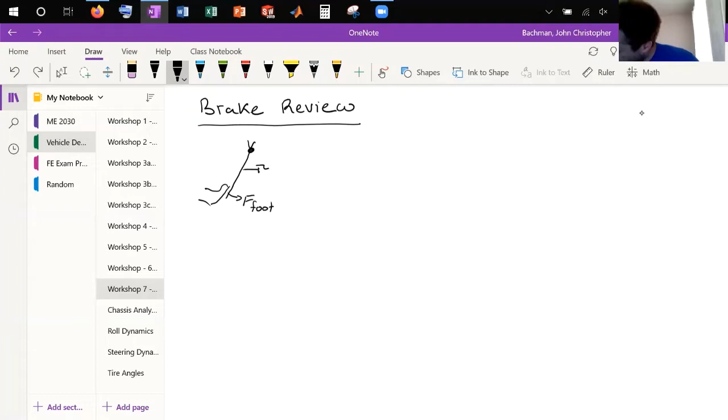So we said a simple model of the brake system was we had some pivot, right? That pivot was basically what our brake pedal pivoted about. Then we had the driver's foot, applying some force here. This was connected to a master cylinder, and we drew a little bit like this. This went out to our tire and our brake rotor, and we had pads on both sides of this thing.

Usually there's a piston on this side, but we'll ignore it for now, as it doesn't really affect whether or not you're going to lock your brakes. This went out to here. This is the system we thought about, filled with incompressible hydraulic fluid. I should draw this better out here. And then we have a big master cylinder.

A couple of the important things we cared about in this case were: the length of the pedal, down here to here. We cared about the length to the master cylinder. We cared about the area of the master cylinder. We cared about the area of the piston and the calipers. We cared about the distance from the center line of the tire to the radius of the pad, so we call that kind of the center line of the pad. And we cared about the coefficient of friction between the pad and the rotor. So those are the important things.

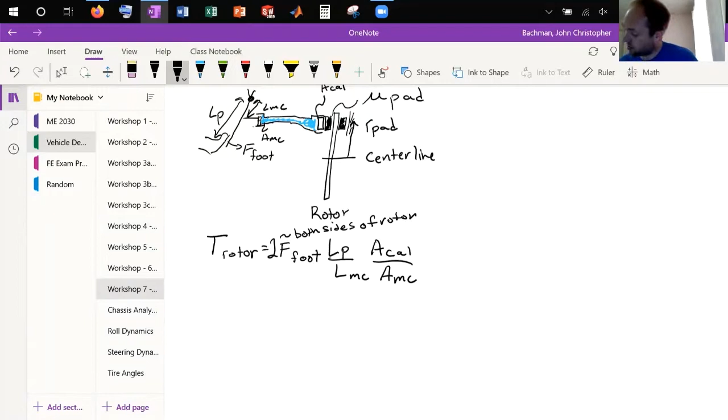Remember, for Baja and Formula we use tandem master cylinders, so that also divided this by 2 down here. So we ended up having two factors of 2 that canceled out. This got multiplied by the coefficient of friction between the pad and the rotor, and then the radius of the pad. So everything to the left here is a force, and the other thing is the radius.

So that was the torque on the rotor, and we compared that to the torque we needed on the tire to lock. The torque we need on the tire to lock was the coefficient of friction of the tire to the ground, times the radius of the tire, times the normal force. And the normal force we found was the weight divided by 2, because we have a left and right tire, divided by 2 times the wheelbase times... so we'll do this for the front.

And we said this was C plus mu times the height of the CG. That was if we drew a little schematic of the car, with the CG here, and this is the height of the CG. This distance from here to here was B. This distance from here to here was C. And this distance from here to here was the wheelbase.

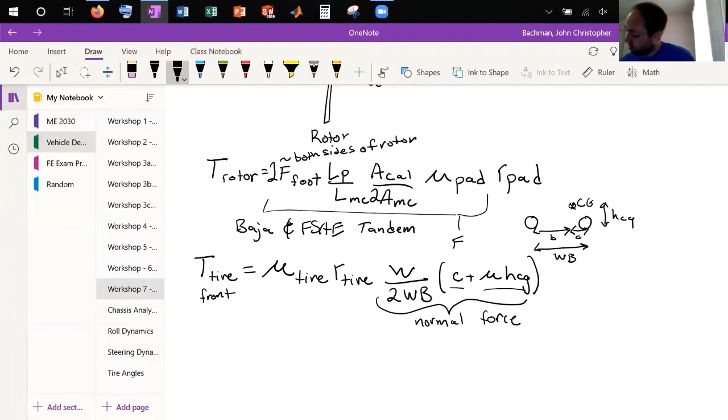So this term, this is the normal force on the front, and it's got two components: the static component here with the C, and the weight shift component. As you're braking, that weight gets shifted to the front. So the equivalent term here for the rear—if it was the rear tire, everything's the same except it's losing the weight shift, losing the weight from the weight shift, and it's a B, because for the rear you care about the distance here. So B minus mu times height of CG.

You might think it's kind of weird—why is it for the front the distance C, from the rear? You can just think about it because the CG went all the way over here to above the front tire.

So this C would cancel with the wheelbase, giving a factor of 1. That says the normal force on the tire statically is the weight over 2, which makes sense if the CG is right over the front, and you just divide by 2 for the left and right tire.

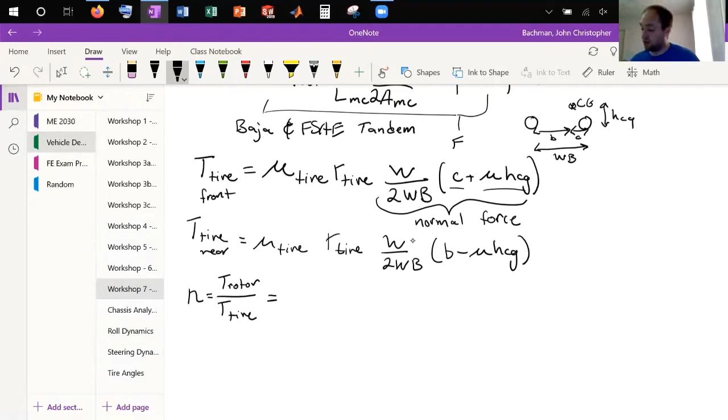So typically we wrote this N as a factor of safety. It was the torque applied on the rotor over the torque needed on the tire to make it lock. We were hoping the torque we can get on the rotor is bigger than that, so we put everything in these terms on top.

So we have the force of the foot, the length of the pedal over the length where it connects to the master cylinder, the area of the caliper piston over the area of the master cylinder, the coefficient of friction of the pad and rotor, the radius of the pad, and then we divide by everything else here.

So I'm going to put the force terms together. We have weight, that 2 will come over the top, but it's okay, wheelbase C plus mu times height CG, and here we have mu of the tire and R of the tire.

So it's kind of cool, like in fluids when you have these non-dimensional terms that affect things. You basically have 5 non-dimensional terms here: 1, 2, 3, 4, 5.

You need to apply more force on the foot than the normal force to get an amplification. Basically, if you can get the length of the pedal bigger than the length of the master cylinder, or the area of the piston on the caliper over the area of the master cylinder, that gives amplification.

If the friction's big on the pad, that's good, especially since you'll be more likely to lock it if you're on ice, where this coefficient of friction will go down. And the closer you can get the radius of this pad to the tire, the better.

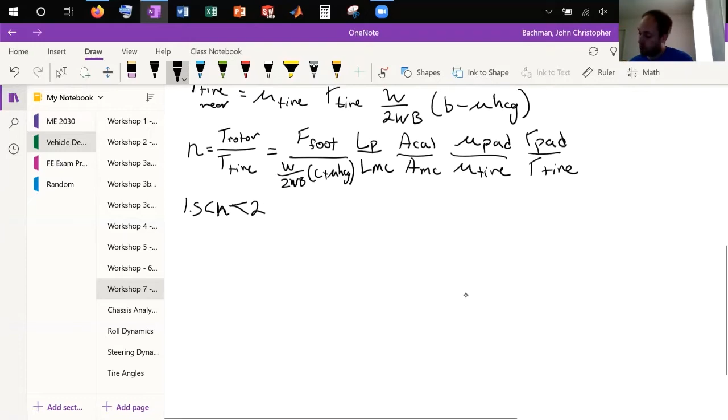Last 2 for brakes, basically. We talked about starting with the inner wheel diameter, so you start with the ID of the wheel to give you an estimate of the R to the pad - the radius to the pad.

And you can look these 2 up. Then to get R pad, you kind of assume to start you probably want LP over length of the master cylinder to be around 3. So that gives you these 2 terms.

You can assume the force on the foot is maybe around 150 pounds, and you can figure out everything about the bottom roughly if you know some stuff about your car. So once you do that, it gives you an estimate of the ratio of the area of the piston on the calipers to the area of the master cylinder.

And you can start to look at the pressure of your hydraulic system, which is the force of the foot over 2 times the area of the master cylinder if you have a tandem setup. So you can figure out what kind of brake system you want - we usually use Wilwood systems. Once you know that, you can begin to package your brakes and calipers.

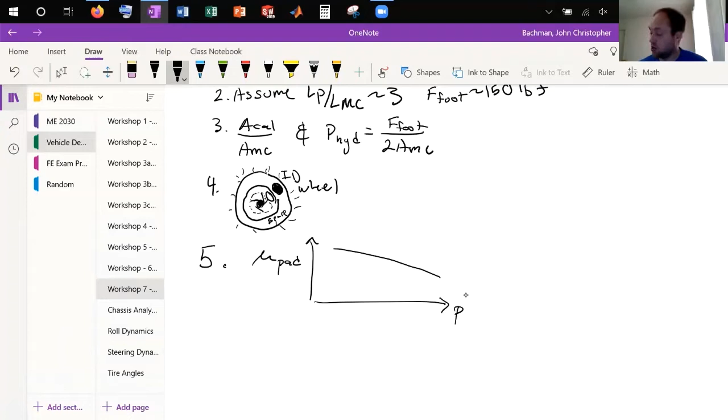We also talked about how the coefficient of friction of your pad versus pressure looks something like this. If you take too many cutouts out of your rotor, or get your pads too small, your pressure will go up. The pressure associated with the force on your brake pads probably looks something like this typically.

If you're not using all of that area, the pressure goes up between your pad and the rotor. Because this pressure I'm talking about is the force on the rotor divided by the area of the pad, basically. So it's not the pressure on the hydraulic system; it's the pressure between your pad and rotor.

That's why higher coefficients of friction happen at lower pressures. We see that with tires too. So you don't want to cut out too much, and we've seen that before. Then you can do thermal stuff, you can do FEA stuff, figure out how thick your rotor needs to be, all that jazz.

So are there any kind of questions about the braking system from folks? Any of these terms?

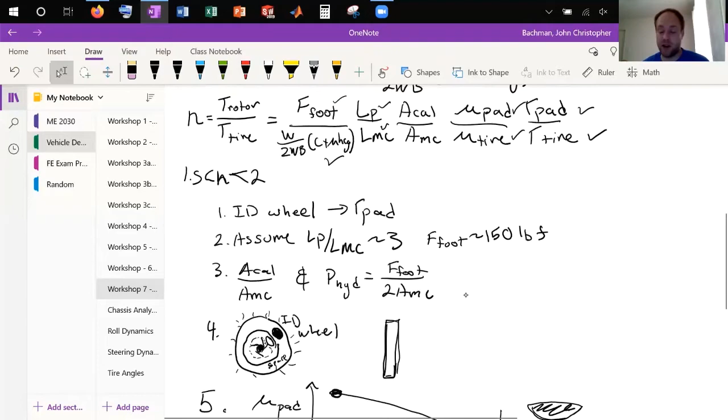But I think this one's one of the more intuitive results in my mind - like why, the kind of things that cause you to lock up the wheels.

So we had that little special session last Saturday about vehicle dynamics and roll, and I'm just going to mention some of the key points here - one, to try and get you to go watch it, and two, because some of them relate to our chassis design. So we looked at a half car model.

Say your car looks like this. Let's say you've got some tires. So let's say your tires pivot about some roll center here. Let's say they've got some spring up to here.

So this is kind of a model where this spring is the wheel stiffness. So this is a spring - this is K wheel, this is K wheel. And we're looking, we could be looking either at the front or the rear right now. And this is the roll center. This might be your CG.

This distance from here to here is the height of your roll moment. The distance from here to here is the height of the roll center, from the ground. Keep in mind the stiffness of the wheel is like how much force is applied on that whole wheel assembly, how much does it travel up and down.

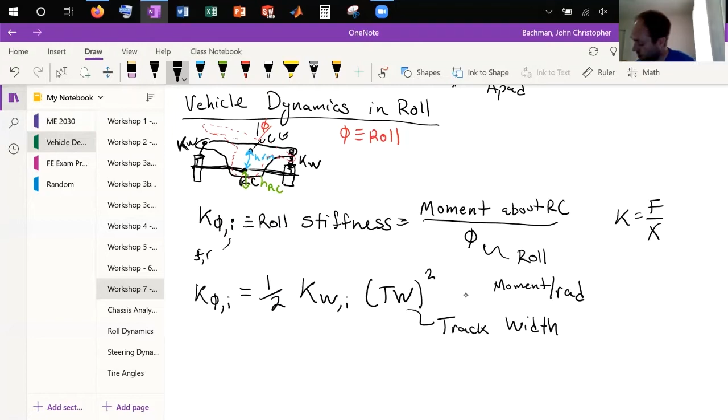Right, so this is going to give you per radian, and you do it in the front and you can do it in the rear. So then we remembered last time that K of the wheel, we relate that usually to a natural frequency, just to get us some of the ballpark, and this was omega n. Usually the rear is a little bit higher, maybe like 10% higher than the front, times 2 pi squared times the sprung mass, either in the front or the rear. So that's how usually we got the wheel stiffness to start.

All right, so we cared about the roll stiffness, but we also cared about this thing we called R roll, which was the roll rate, or roll flexibility. This describes how much the car rolls, so like phi, how much does the car roll per lateral acceleration. So if you took like a 2g turn, how many degrees or radians does the car roll - that's what this number tells you. And so we found our roll rate.

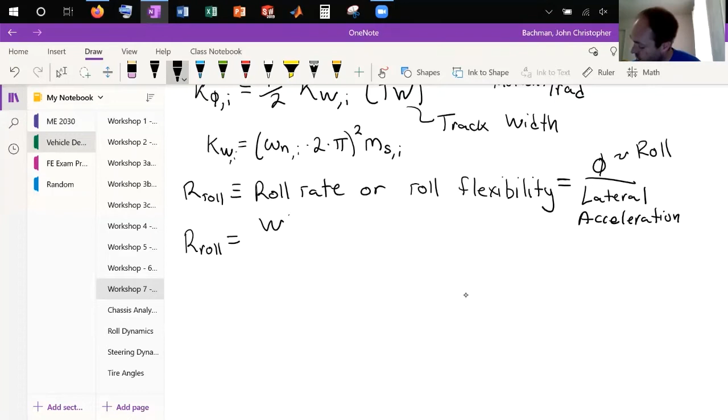And last time we said, okay, what is causing this roll? And so that was the mass divided by, in this case since we're doing this per acceleration, we divide by acceleration. So mass times acceleration times the height of the roll moment. And this was the height of the CG minus the height of the roll axis, so the roll axis above CG.

So this was kind of weird in that in a car, you have a roll axis probably a little higher in the rear than you do in the front. So your car rolls about - this is your height of the roll center in the rear, height of the roll center in the front, so this is your roll axis. So your car rolls about this roll axis connecting your front and rear, and your CG might be here, so the height of the roll moment is right here. So for the whole car, that's your height of your roll moment.

It's actually like, so you kind of have to imagine you have to know something about the front roll center, the rear roll center, and you have to draw a line between them and then get this distance. It's not too hard to do mathematically, it's just the line. So that's how you find this height of the roll moment for the whole car.

And then you just divide that by the stiffness. So you have K phi of the front, plus you have a term for the rear, and you have actually minus this weight times height of the roll moment. And that's because, as it rolls, this CG actually rolls too, which now the weight of the car actually helps it roll more. So that's why you get this little term. It doesn't, if you neglected it, play a huge role typically, but it's there.

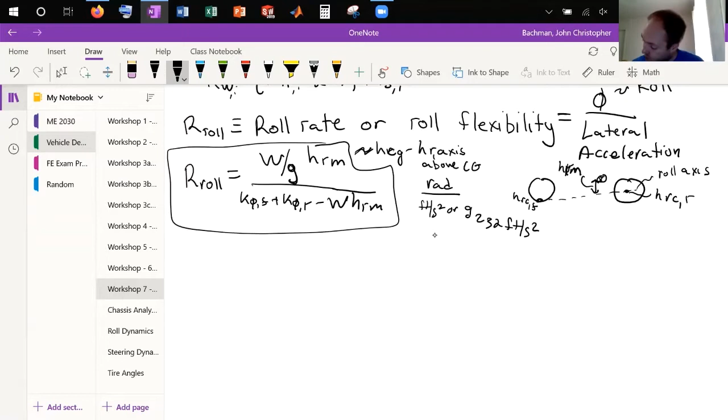So then what we kind of cared about, actually maybe the most, was what was called the lateral load transfer distribution. How much load is being transferred in the front versus in the rear? This was LLTD, is what most people call it. What's the LLTD? So we compare, and this is usually front divided by rear, because you want close to the same load transfer.

So if you have more load transfer in the rear, you're going to get oversteer essentially, and if you have more load transfer in the front, you're going to get understeer.

So I'll go into that in a little more detail. This LLTD, the load transfer in the front, we found was the roll stiffness in the front times the total roll rate. This is for the whole car, not for front and rear separately. There's no roll rate defined for front and rear individually, it's for the whole car.

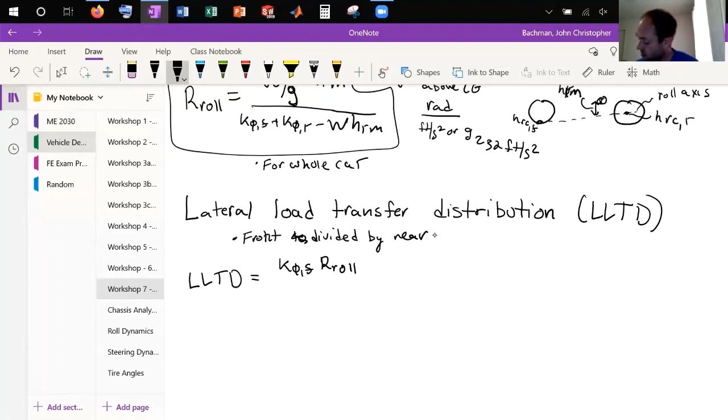But this other term is for the front. When you multiply these two together, you get roll per acceleration. This term up here is moment per roll. So what that gives you is moment per acceleration. It's kind of like the moment is what's causing the weight transfer.

So you have K phi F times R roll, plus you have the weight of the front divided by G, times the height of the roll center of the front. That's the height of the roll center. And you have the same terms for the rear: K phi of the rear times the roll rate for the whole car, plus the weight in the rear divided by G times the height of the roll center in the rear. So this term is kind of the weight transfer through the suspension links.

And this term is going to be equal to the weight transfer through the springs.

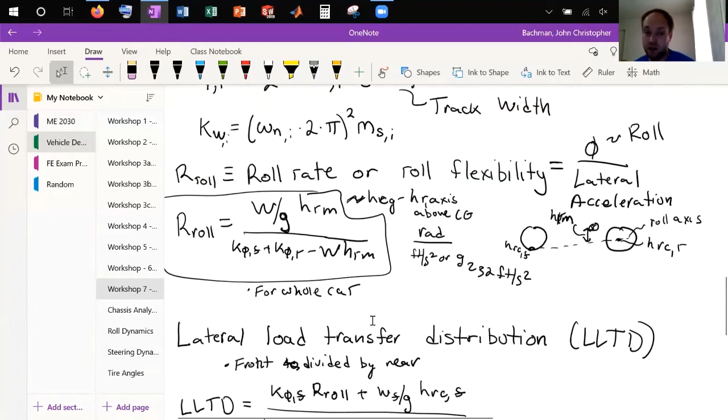The way you can see that is, for example, if you designed your roll center all the way right here at the CG, then your car doesn't roll, because you have no roll moment, so your R roll is 0. And so these terms basically go to 0. So how is the weight being transferred? Well, in that case, the weight is basically being transferred directly through this link, between the suspension, through your lower control arm and upper control arm.

And so you usually design this, you want your LLTD desired. You usually design it for a little under 1, about 0.85, because stuff that you don't take into account usually causes you to understeer. There's compliance in all your links, the camber of your tires. Usually things cause understeer.

So we err on the side of making the car oversteer.

So an LLTD of less than 1 is kind of oversteer, because that means you have more weight transfer in the rear. And LLTD greater than 1 is understeer, because you have more weight shift in the front. And so you go a little under 1. And so what you're typically going to find here is you're going to get like 0.5, 0.6.

And so you need to make your rear a little bit, you need to make your front a little bit stiffer. You need to bring this up.

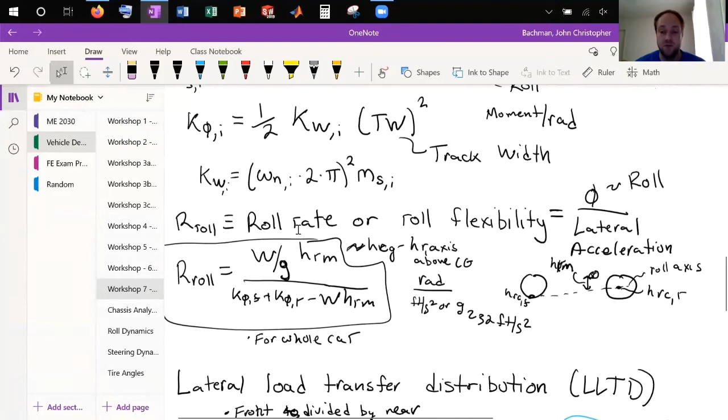You can obviously adjust it by adjusting the stiffness of your shocks, right? Because we see this, so if you can adjust your stiffness of your shocks, you can adjust your tire pressures, you can do a lot of stuff. But usually you'll see a car will have several spots that the anti-roll bar can be connected to. And the reason for that is so that you can adjust the stiffness of the anti-roll bar to tune this in so you're getting neutral steer, basically.

So that's a little bit of the basics about roll dynamics and how you handle it. We were doing a lot of linear systems before, but how do you consider roll, which is especially big for formula. But I think Baja, interestingly enough, always makes this interesting.

They want a crazy amount of oversteer because they have a fixed rear axle, so they have trouble steering. If they have a ton of oversteer, they can kind of drift. So they artificially make their rear super stiff with super stiff springs, but in actuality, it makes it harder to drive over the bumps. I think ideally we use an anti-roll bar rather than make our rear springs so crazy stiff. I think it also causes the forces in the rear to be larger than they need to be, so I think we also break things more likely because of it.

That's just total speculation. I have a question - that anti-roll bar, that's just for the front? So if you did the rear, you'd put it on the bottom?

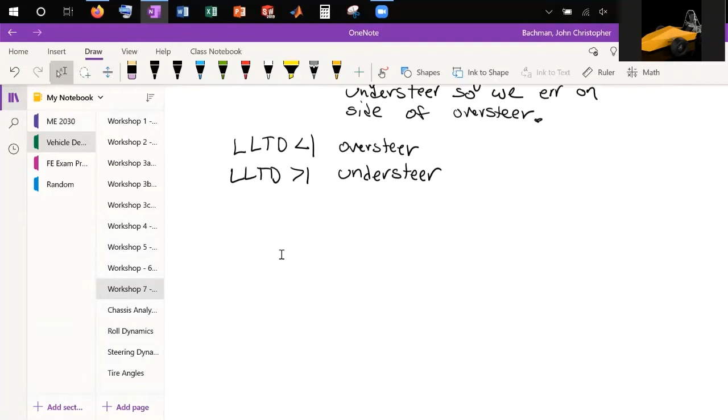Yeah, exactly. So for example, if you found we need to make it stiffer in the rear to get down to this, then you do the same thing, but you'd add one in the bottom. Or you should also be checking your phi max.

What's the max amount of roll you're going to get, which would be your R roll times your max lateral acceleration. And then basically, what you do is you get delta, let's just say max tire travel, is going to be equal to your phi max times your track width over 2.

And so in that case, you have to make both the front and rear stiffer. So if that's the case, you might add them to the front and rear to make this whole part stiffer, to make the whole car stiffer, and then you can adjust them to get the desired value of this.

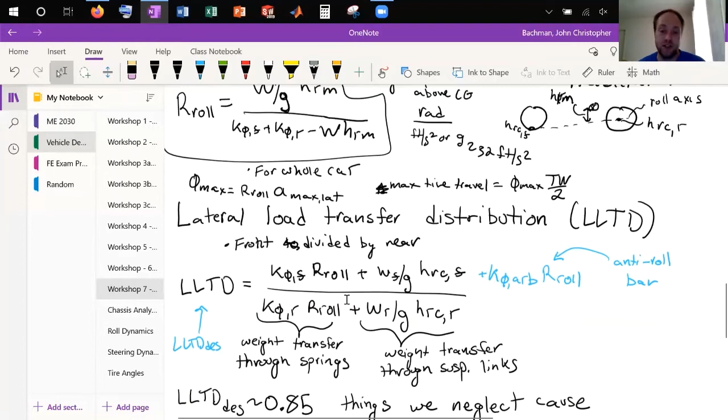Keep in mind when you change this, it also will affect your roll rate, so you should actually iterate on this process. You should figure out what this is, then add this term, just the K phi part, into here, recalculate R roll, and recalculate your LLTD again. Because this R roll is also a function of this term, so when you change this term, it'll actually change R roll too. But usually if you do this one iteration, it's pretty close. So that's a little bit of the last bit there.

So I think we're ready now to talk a little bit about the chassis, or otherwise known as the frame, or I think the Baja rulebook calls it the roll cage. So of course this is kind of, we usually do a tube frame. There's monocoques and other stuff these days, but I think for us, probably we're going to be doing a tube frame for at least the next 3 to 4 years. I don't think there's that much to gain from it, and I don't know if we have the resources to start doing the monocoque quite yet. We're not even doing aero yet.

But so I think first rule of chassis is pass all the rules. This is the one subsection that has the most rules associated with it. The nice part about it, if you pass the rules, it'll typically help you do the other things. But I find too often with our teams, people just don't even know the rules. Sometimes I feel like I'm coaching a basketball team, and one half of the team is arguing we should shoot the 4-point field goals, and the other half is arguing we should shoot the 1-pointers, and then we spend like a week or two arguing about which one's a better strategy, and then we look in the rules and realize that's not even something in the rules. So it's like our meeting - this is a competition, right?

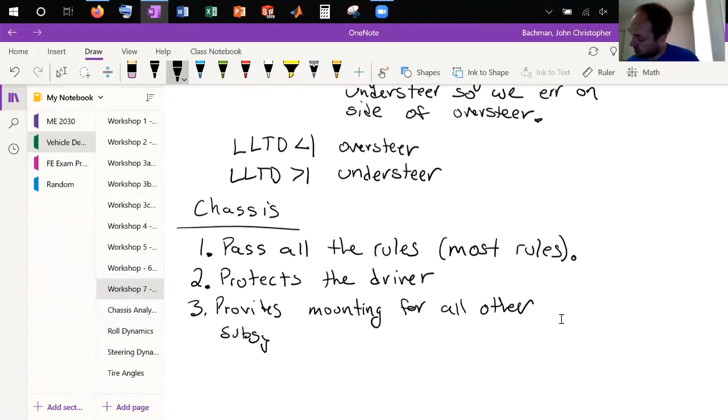So this person almost has to be kind of somewhat of a systems level engineer, because, well maybe not, maybe we shouldn't call them a systems engineer, but they would have to work a lot on integration, let's say. So these are some of the main points here.

So let's look at a couple of the Baja and formula frames here. Let's look at the Baja one first.

So this is Baja. Interestingly enough, they have two kind of bracing options, one with extra bracing in the front and another with extra bracing in the rear. We still kind of run the engine in the rear, so typically we need extra space back there anyway, so we typically run the front bracing.

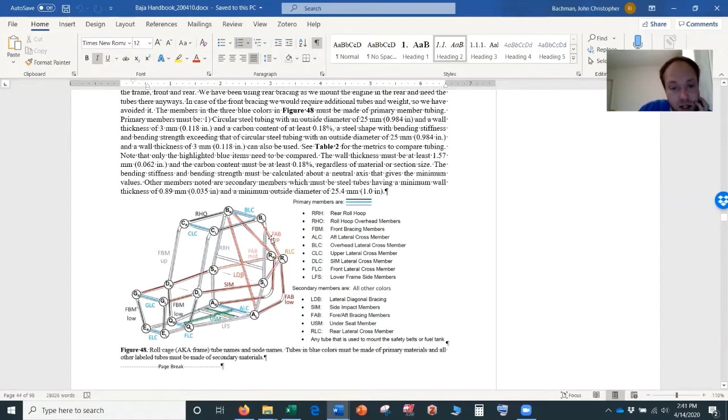In this drawing in our handbook, anything that's a shade of blue, dark blue or gray, is primary tubing. You can see this nose, up to the overhead member, and down here, this is all what's called primary tubing. So that's how Baja does it, they have primary and secondary, and then everything else is secondary that's required.

And if you add in any other tubing not associated with this, it can be whatever you want. In Baja, their primary tubing has to be equivalent to a 1-inch outer diameter and a 1/8 wall thickness, basically. At minimum it has to have at least a 1/16 wall thickness, you can't go any thinner than that. For their secondary members, it has to be a minimum wall thickness of a little over a 32nd, and it has to be at least 1 inch.

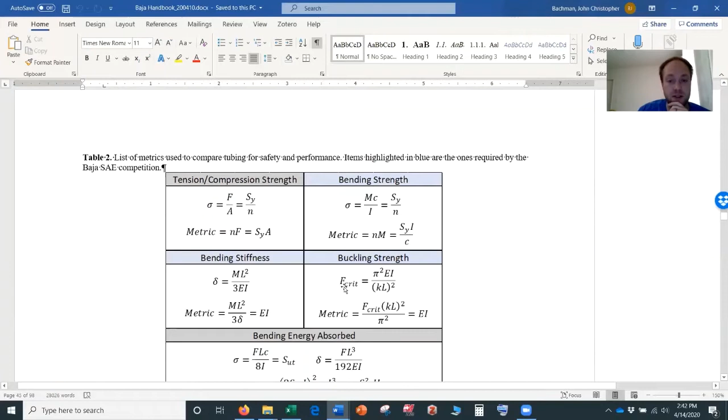So for secondary you can't do equivalents, but for primary you can. And the metrics you have to care about for Baja are bending strength and bending stiffness. But buckling and bending stiffness actually seem to have the same metric, so those are the ones we'll care about for them. They give two values for the yield strength of steel and the Young's modulus of steel.

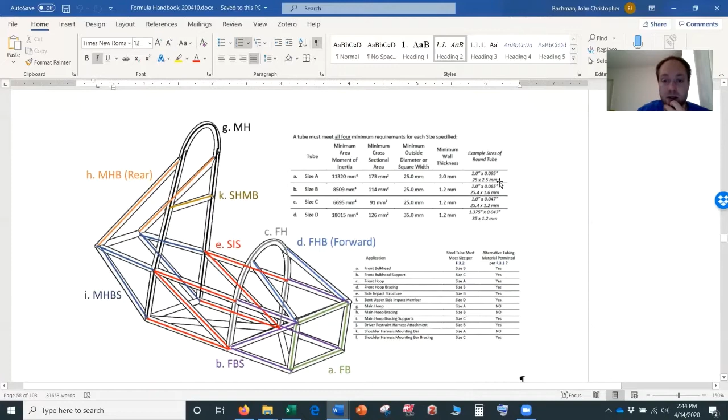And if you want to use a tubing that does not meet all 4 of these, you need to check the equivalence of both tension and compression, the bending strength, the bending stiffness, the buckling strength, and the bending energy absorbed. So they give you these values. The yield strength, surprisingly enough, is quite a bit lower than what they expect for Baja.

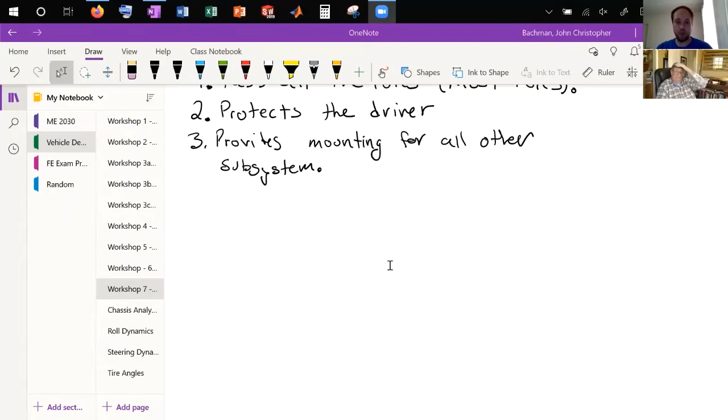And then let's talk a little bit about how you can check this equivalence on these tubings - tubing equivalence. So the first thing, let's talk about if it's equivalent in tension and compression.

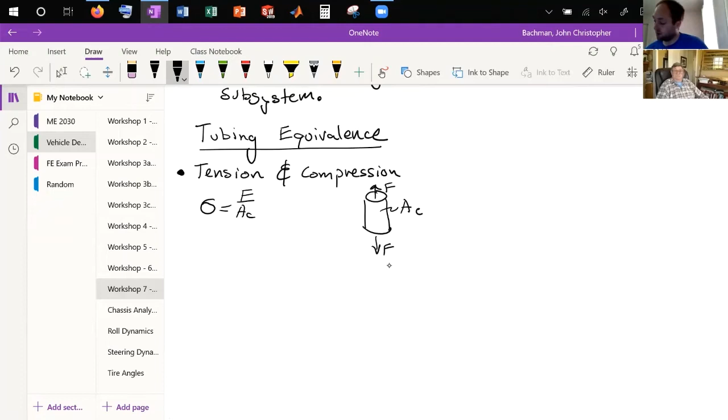So the stress from tension and compression: you take a tube, pull on it with some force F, it has some cross-sectional area AC. The stress is just the force over the cross-sectional area. And the factor of safety, whether it's going to break or not, is equal to the yield stress over this stress that you're applying to it, sigma.

And so if this gets less than 1, then it's going to break, because that basically means this got greater than the yield stress, which you don't want because the yield is our failure criteria in this case. So if we replace this, we get SY times area of the cross section over the force.

And basically we make a metric to say how strong it is. So the metric in this case should be the product of the factor of safety and that force. So if your tube can get a higher factor of safety for the same force - basically a bigger number here - that means it's better than this tube in tension and compression. So this is the key metric: the yield stress times the cross-sectional area. If you have a bigger yield stress, you have a higher factor of safety for the same force.

So let's say tube 1 has a greater value of this metric compared to tube 2 - that means that for the same force, it has a greater N. So let's say these two happen to be equal; its N is greater than tube 2. So you can use this to say, is tube 1 better than tube 2? Is the yield stress times the cross-sectional area for tube 1 greater than the yield stress times the cross-sectional area of tube 2? Which basically means if you can get a tube with a higher yield stress, you can decrease the cross-sectional area.

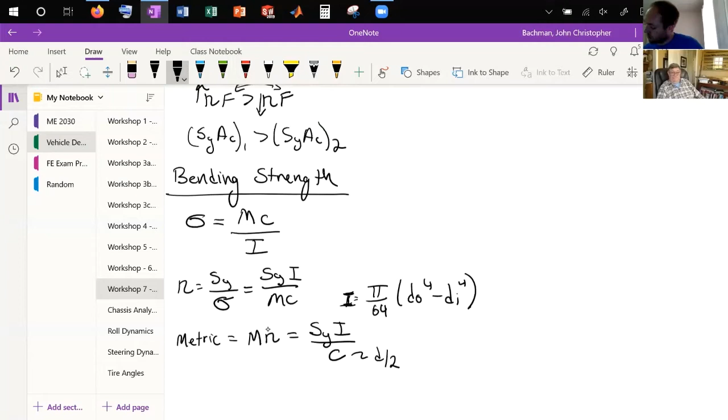So I is equal to... right? And again, we're going to compare: does this tube, with this outer diameter, have a greater SYI over C as our metric for whether it's stronger or weaker, basically?

All right, and then we have bending strength or bending stiffness. Stiffness is different than strength because it looks at how much something deflects.

For example, the deflection of a beam: the end is fixed, and you apply a force. It's going to be equal to the moment, and that moment is F times L. So the moment at the base is F times L.

So it'll be the moment times length squared over 3EI. Or you could say this is FL cubed — maybe FL cubed is better.

FL cubed. But typically for our metric here, what we do is say for the same delta, FL cubed, and we'll multiply by 3 delta. I'm going to invert this — move the delta over. So I get FL cubed over 3 delta, which is equal to EI.

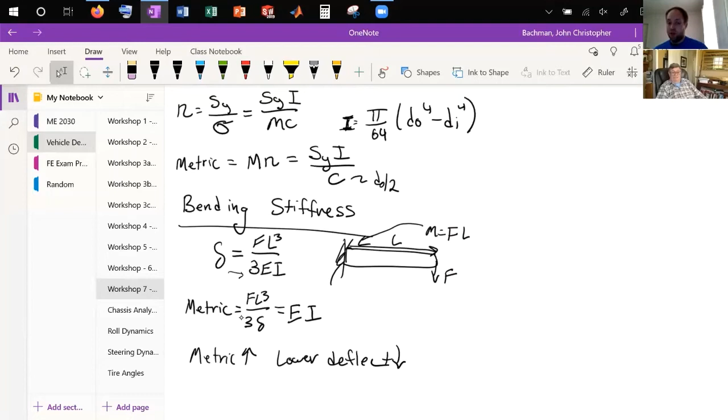So if this metric is high and the force is constant, that means delta is smaller — the higher this metric, the lower the deflection, for an equivalent tube, force, and length, since we're not changing the tube's length, just its cross section. So that gives us EI as our criteria for bending stiffness.

And then we have buckling strength. So if you have a beam, it depends on whether it's pinned or fixed, but we typically just look at the case where this factor is 1.

Let me see, I forget what case that is — I think it's probably pinned. K is 1 when both ends are pinned, yeah. So we do the both-ends-pinned case because we really just care about the cross section, we're not changing the way it's pinned.

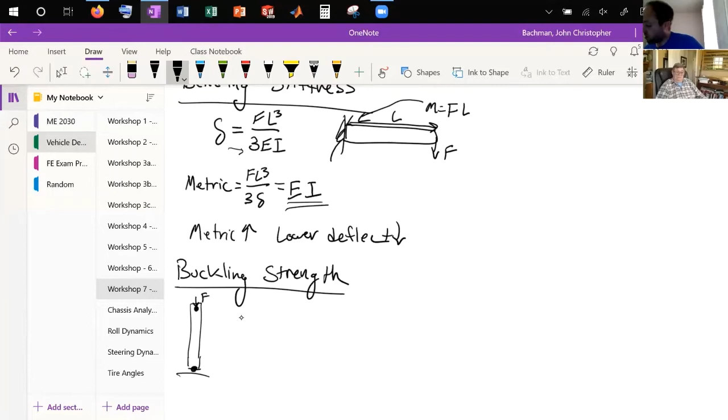This will fail in buckling, which basically means the side will kind of blow out before anything sees the yield stress. The critical force for buckling is pi squared EI over K times length squared. We usually put in this K factor, which is just for the end conditions, fixed or pinned — the end condition factor. We just assume it's 1.

So basically in this case we make a metric: this force times KL squared divided by pi squared — we put all the constants in here. The higher this value is, the less likely it is to buckle, and this is equal to EI. So you see we actually get the same thing — buckling and bending turn out to be the same, so you don't need to do both.

So basically the higher this metric, the higher the force needed to break it, which is good — if you find a tube that is higher or equivalent in this metric for the two tubes, meaning the product of the Young's modulus, how stiff the tube is, times its second moment of area, it's good for both buckling and bending stiffness.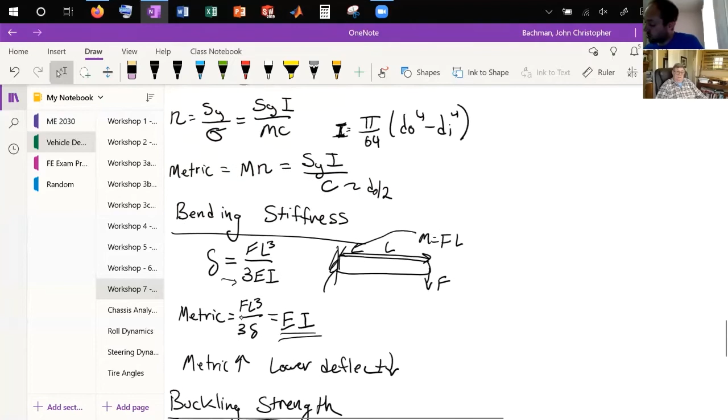For bending strength, you need a high second moment of area times yield stress, divided by the distance to the neutral axis, and then yield stress. It makes sense that the criteria for buckling and bending, which deal with things deforming, are related to the Young's modulus, while whether they yield is related to the yield stress.

So the last one is about bending energy. They don't actually say it has to be bending energy, but I think that one makes the most sense — it's basically like in an impact. Let's say you have some tube...

Like this is maybe your side impact structure, and you hit some huge force on the side. They want it to be able to apply some force over some distance before the thing ruptures, so some distance d. That's the energy dissipated by this tube before breaking.

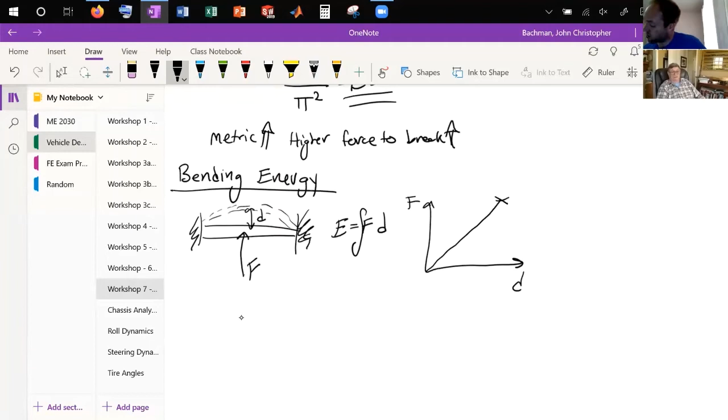So this energy is the force applied to the tube times the distance. And it's actually the integral of this, because you might see the force versus distance curve looking something like this until it ruptures, here's where it breaks. You keep pressing it harder and harder, it keeps going further and further, and then it ruptures.

The area under this curve is E. So for this pin beam, we know that the stress at the ends, where it's going to break, is equal to the force times the length times distance to the neutral axis, over 8I. We can just look that up in a table.

And we relate this to the ultimate tensile strength in this case, because if we take a hit like this, we just want to see how much it can take before it actually gets buckled in. So we know this is the force we're going to apply. Our force is going to be the ultimate tensile strength times 8 times I over its length times C.

And then the amount that it deflects, this distance d, before it breaks, will be F times length cubed over 192 EI. So to get the energy, we see that the deflection is linear to the force, so that means it's a straight line.

So if we multiply this value, delta, times this F max, the area is just equal to F max times delta over 2. So we really just have to multiply these two. We have force, and now we have delta, so the energy is just force times delta over 2.

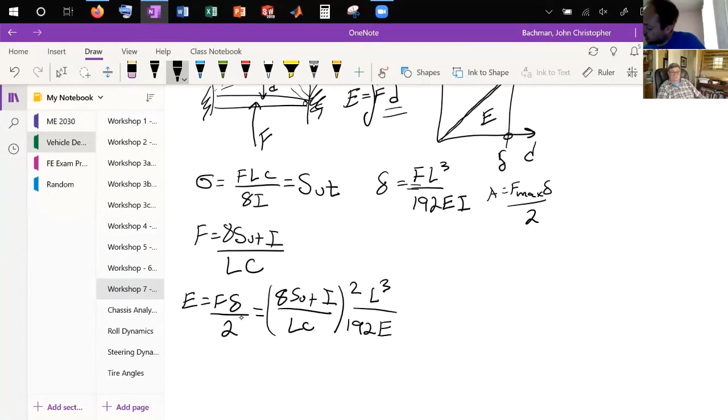And so this is going to give me E. I'm going to have this 8 squared, which is 64. I forgot this 2 down here, 2 times 2. And then I'm going to have this ultimate tensile strength squared. I have 2 I's on top.

I have 2 I's on top, but canceled by 1 here, so I'll get 1 I here. I have 2 L's on bottom, and then 1 L here, so I'll get another L on top. And then I'm going to get 2 C's on bottom, so I'm going to get a C squared. I'm going to get 2 times 192, and then I'm going to get an E on the bottom.

And so this will reduce down to... this must be like a 6 or something. That's 2 times 3. Oh yeah, so this should be SUT squared times I times L over 6 C squared E.

And so for my metric, in this case, I want the most energy dissipated. This E is Young's modulus, and this is energy, so I should put energy. So let's just do energy, I'm going to want it to be the energy.

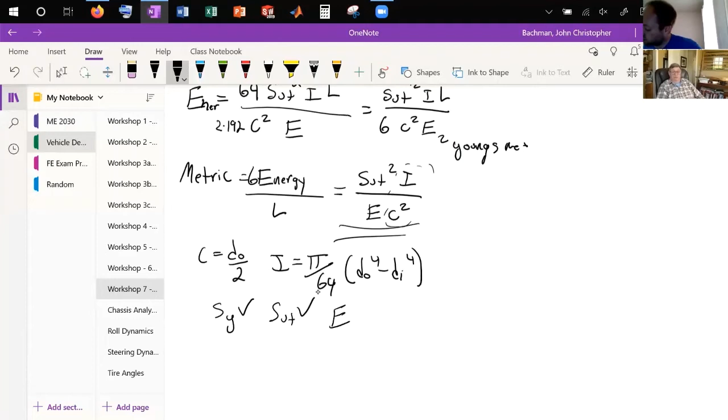And all of these C's are like d outer over 2. All of these second moments of area are pi over 64 times d outer to the fourth minus d inner to the fourth. And then they have yield stresses, ultimate tensile strengths, and Young's modulus that they give you to compare to. So all we're doing is asking: can we find a tube that's lighter, but that is stronger in bending or can take more bending energy, is stronger in buckling, is stiffer in bending, is stronger in bending, and is stronger in tension and compression.

Baja, you only have 2 metrics. So what I basically did is I made a little tube calculator for myself. Hopefully folks, you guys can see my screen, right?

Yes, so I put in the outer diameter in inches, it calculates outer diameter in millimeters. I put in the inner diameter, calculates the thickness in millimeters. I put in the length and all these properties, and it calculates all this stuff.

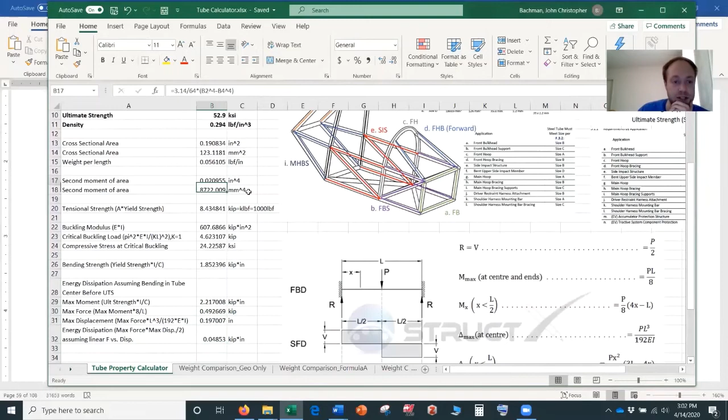And it was funny, I was kind of looking at all of it and I was thinking, well, this is gonna be really annoying just to put this in for a bunch of tubes. So what I decided to do instead was put in the reference geometry. So this is weight comparison of formula with A tubing basically.

And I put in the outer diameter, I put in the inner diameter, right? And then I solved for what's the cross-sectional area. I calculated the second moment of area. I divided by C, right? Second moment of area divided by the diameter over 2, and divided by this. And I said, what are the properties of this? So I just put in the reference properties and I put in the density per inch basically.

So this is basically going to be the density times the cross section. And then I kind of asked myself, so if I get a different tube...

and I fix the outer diameter of that other tube and I fix the material properties, how big can I make the inner diameter? So like how thin of a wall tubing can I get so it's just as strong in tension, basically? This is kind of the inner diameter of a tube that's just as strong in tension as this. I did the same thing for buckling, bending, and energy dissipation, right? Kind of those 4 things, since we saw that buckling strength and bending strength matter.

And I got these plots. So basically right here on the horizontal scale is the outer diameter. And on the vertical scale, I plotted the weight of the smallest tube that meets that criteria, right? And so black here, this is the weight of the reference tube. It weighs about 0.08 pounds for every inch of length you use.

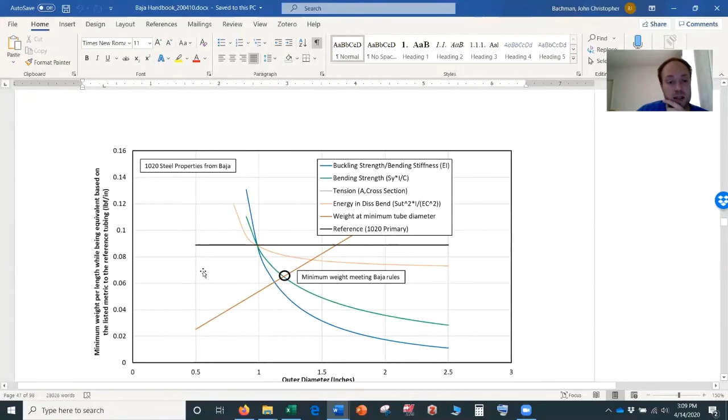We could ignore this yellow one because there's no energy dissipation requirement for Baja. But you could actually come down here into this weight, about 0.065 with regular steel, and that's not all that different from the chromoly. So it's interesting, the chromoly for Baja doesn't make it that much stronger, or that much lighter.

But keep in mind, you might be able to find chromoly with higher specs than these. I don't know, I kind of just grabbed these specs from online, but you'll have to get a certified material, so it depends also what certified material specs you can get. If you get stuff with a higher yield strength than this, then you could even make stuff a little lighter.

So that's kind of how you game it. It was interesting with formula, because people had always been saying, oh, you can't, because of the tension and the buckling, all these requirements, you can't actually get much lighter. It seems to me you could get 20 to 30% lighter.

You'd have to use chromoly, which is more expensive, harder to machine. It's not any stiffer, keep in mind, chromoly steel is not any stiffer. It's not going to help with your torsional rigidity. All it can do is help make your car a little bit lighter.

So I don't know if that's worth it or not, but a frame that's 20% lighter is, I don't know, 5-10 pounds. So I don't know if it's worth the hassle for 5-10 pounds, but just something to think about in the future.

And you could, at least you want to be able to tell the judges that you thought about it, they're going to ask you, why'd you pick that tubing, right? So you should at least have some kind of answer, not just, oh, we were lazy, but like, we considered the different options and we weren't able to save that much weight based on the rules.

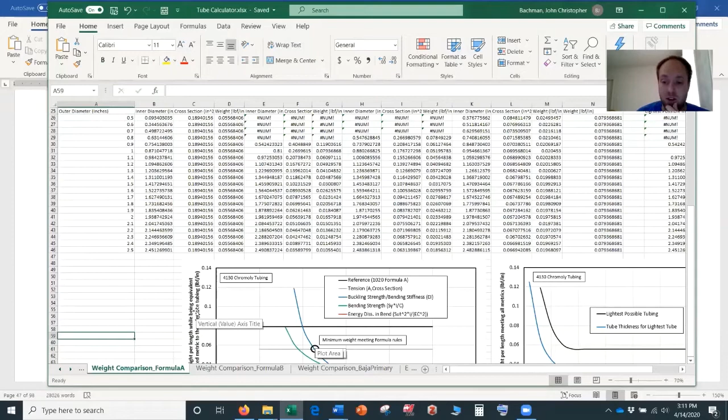So I think even if you don't act on it, it's still cool to do analysis to say, we knew we could do this, but we decided that the cost and ease of manufacturing was more important than the extra 5 pounds, right? I mean, there's a lot of ways we could save 5 pounds on the car.

Chris? Yeah? You had a chart up here where it showed a formula chassis, like different colored tubes, and then it showed what the different... over here was showing. Maybe I was looking at something else. It showed here where the wall thickness of some of the tubes are like half.

These ones? I'm not sure if this is the same one. Let's see here.

Okay, right. A tube is 95 thousandths wall. A D tube is 47. So that's half the weight.

But keep in mind, if you look at this chart, you can only use the D tube for the bent upper side impact member. So you can't actually use the D tube everywhere. You don't have an option between A, B, C, D. This chart basically says for the front hoop, you have to use A. So they know these are not equivalent, but they specify the minimum requirement for each tube in the chassis.

You'll see some, like the main hoop, you cannot even use an alternative tube. The main hoop and the main hoop bracing, you can't do this for. You have to use something that meets these requirements. There's a couple of tubes that they actually check, and the main hoop is one of them.

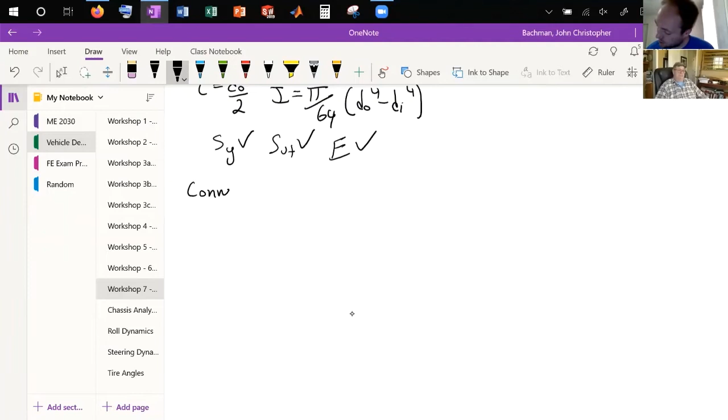All right, so another really important part about the frame — connections to the frame. So that's just the tubing, right? We haven't even talked about anything really important yet. Connections to the frame, getting wound up.

So, right, all connections should be to triangulated nodes.

Let's look at one of our example tubes. Let's say we have a case where we hook up to one of our tubes, and let's put all of our tubes maybe just 12 inches long. Let's say what happens when we hook it up and put a force on a triangulated node. The nice part about triangulated nodes is it puts stuff in tension and compression. Non-triangulated stuff puts it in bending.

So let's look at the relative strength and stiffness of putting a tube in compression versus putting it in bending. We won't even do the worst case scenario bending. Let's do the case where we're putting a force halfway on a fixed tube.

All right, so let's compare. We'll do this just for the primary formula tubing. So in this case, sigma is F over A, and let's put in a pretty common force, like, I don't know, 100 pounds.

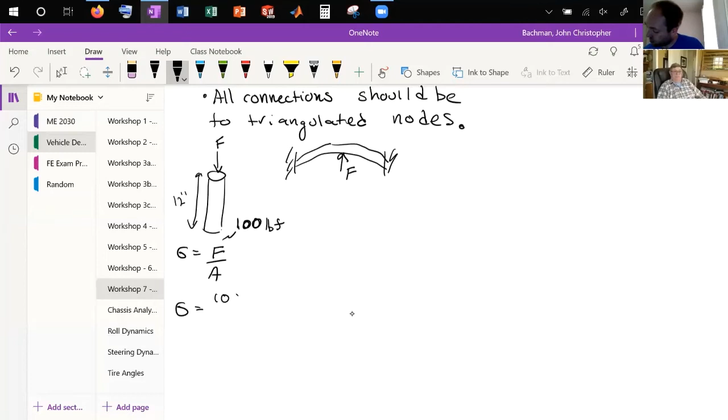So sigma is going to be equal to the force, 100, over the area of our primary tubing, which is 0.27 inches squared. We don't have to worry about the factor of safety. So what's the stress in this case? Maybe it looks like around 400 psi.

And let's look at the deflection. Sigma is also equal to E epsilon, right? And epsilon is strain, which equals change in length over length. So we're going to basically have change in length is equal to sigma times the length over E.

So this is about 400 psi times 12 inches divided by about 30 mpsi. This is roughly the Young's modulus for steel. So you got 400 times 12 divided by 30 e to the 6th. So this is 0.1 thousandths of an inch.

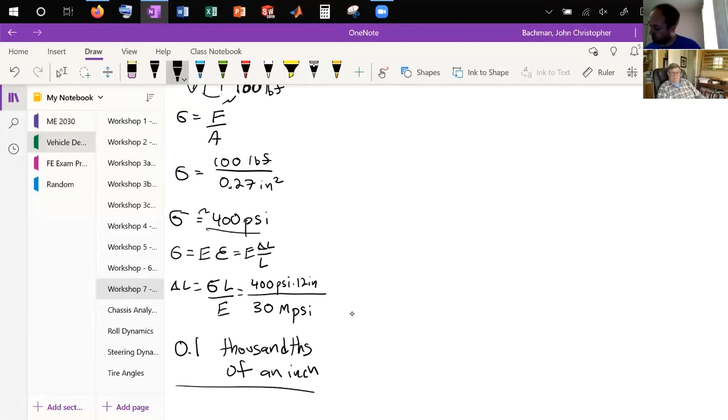So it moves some, but only a tenth of a thousandth of an inch, right? And we're at 400 psi. So let's look at what's the case though when we put the tube in bending. Let's make that quick comparison.

So the stress in this case is equal to the force times the length times C over 8I. So for our case, we have 100 pounds force times 12 inches over 8, and then I over C for formula A tubing is 0.056 inches cubed.

So that's going to give us 100 times 12 divided by 8 times 0.056. This gives us sigma is equal to 2,679 psi, which is equal to 7 times tension/compression. So basically, if you decide to mount your tube in the middle, put a mount in the middle of your frame, then it's going to be 7 times weaker, just because you chose to mount it out there.

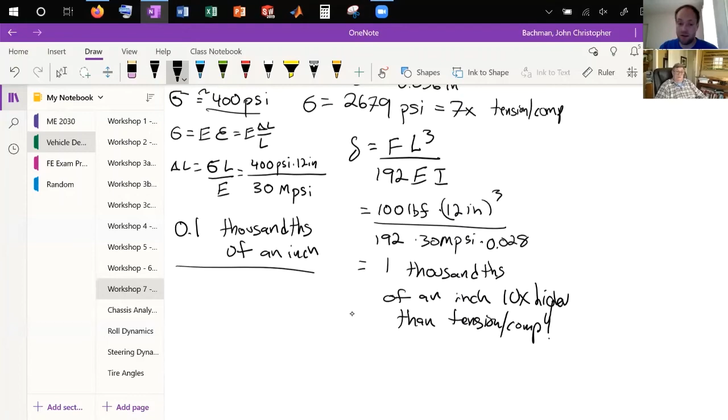So this is why it's so important, one, to triangulate things, to keep things from being in bending, but also two, to mount everything at a node. You'll notice that's why the formula frame requirements care so much about things being triangulated. They're strong because things are in tension and compression. And that's why you'll see so many teams mount everything at a node.

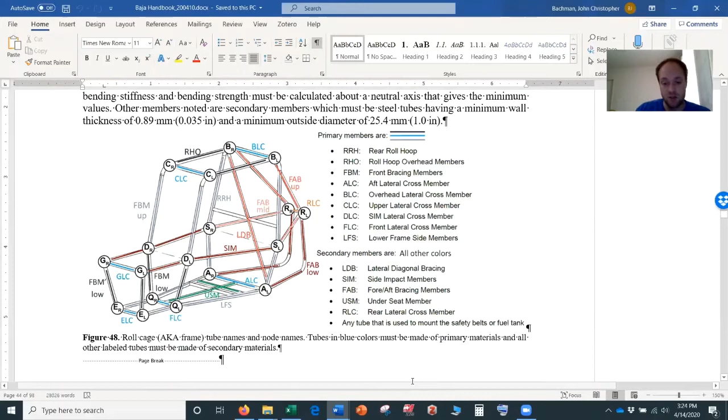So the most common approach, if I had to make a frame, I first would consider the relative strength and stiffness.

So first I would make tetrahedra, and I'd put forces at the nodes on a tetrahedra. Next I would do triangles, and I would put a force in the plane of the triangle.

This will cause things to buckle pretty easily, but you could do a force on a tube. The last thing I would do would be to put forces at tubes in the middle, especially like we'll see some of the Baja tubes - stuff will come up, and they'll put some sort of triangle piece here and apply a force here. So that tube's in bending in the middle, and we're torquing it and bending it. So that's not as ideal.

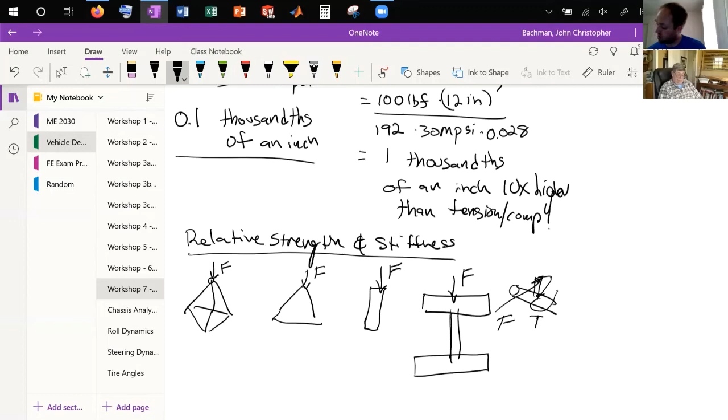If you are going to do a tube like this, you could at least put a tube across to the other side of the frame, to help you use the stiffness of the other side, or even tie this into a node. If this is a node, you could tie these into nodes to help you out on the other side of the frame. But some of the stuff you don't have cross members for - one, because you might not want it to be too heavy, and two, you don't want it interfering with the driver's legs. So there's some places where a cross tube would add stuff to the driver's legs.

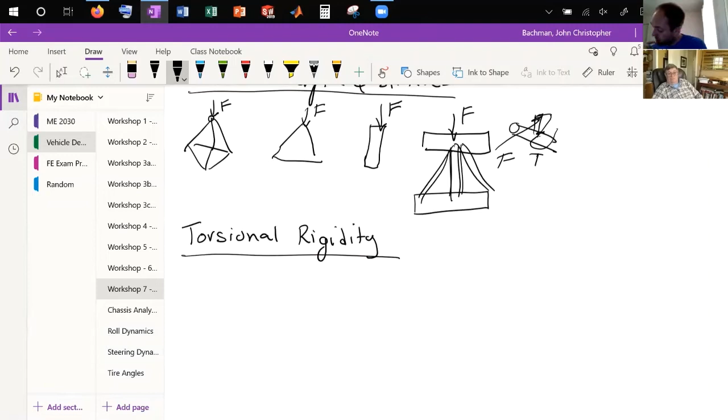So the most important metric usually for a frame, first thing, is the torsional rigidity of the frame. So what number should you pick for the torsional rigidity of the frame? That's kind of the case, right, where if you look down the frame...

Torsional rigidity - what's the best way I can get a picture of torsional rigidity? Just go to Google.

So you can imagine the torsional rigidity, right? It's basically if you fix these front two, so these are fixed, and fixed, and if you apply a force up here and a force down here, how much does this thing rotate?

Also what's important is the bending. A lot of times you'll notice, for this, bending is basically if you kept these two straight and you put up on both sides. So this is like torsional rigidity, and then bending would be if you did both up - this would be like F and F, and you fix those other sides. This would be like bending. But these two are typically related, as you can tell - one's just both going up, one's going down.

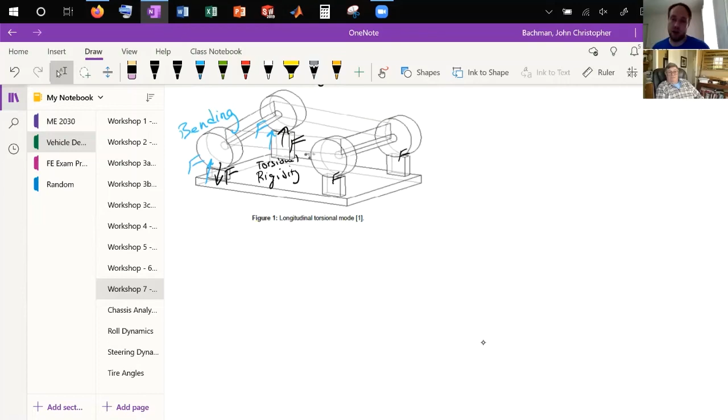So most people's primary metric is the torsional rigidity. The question might be, what torsional rigidity should I be testing my chassis for? So the question is, what issues arise when you do not have enough torsional rigidity? The one thing you spend a lot of time designing is your load transfer, front and rear. In your front and rear calculations, you assume the chassis is rigid. So if your chassis is less stiff than your suspension, then all of your calculations assuming the chassis is stiff are kind of wrong.

So a lot of times what people do is they say, okay, I want the roll or rotation of my frame to be less than 10% of the total roll compared to what I'm getting in my suspension, which typically involves making your torsional rigidity maybe 10 times the roll stiffness of your car. And that's why the roll stiffness number is kind of important.

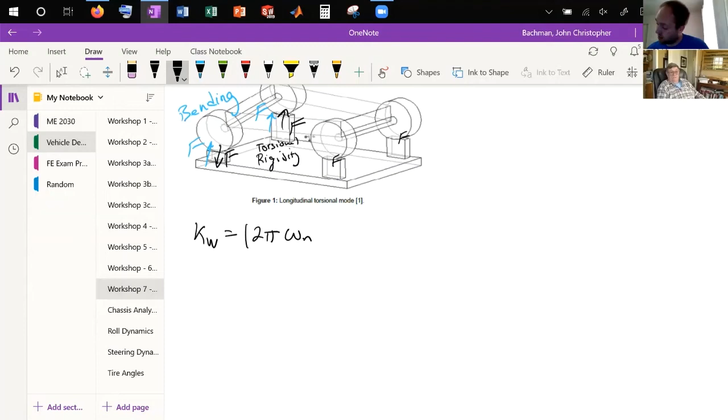So let's give us a ballpark number for formula. We said that K of the wheel equals 2 pi times omega n squared times the mass of the suspension. So for FSAE, maybe omega n is around 2 hertz, and the mass of the suspension is maybe 130 pounds force divided by 32.2 feet per second squared.

And for Baja, you're probably more in the range of 1 hertz, and your sprung mass is maybe on the order of 100 pounds force divided by 32.2 feet per second squared. Let's do a quick calculation: 2 times 3.14 times 1 for Baja squared, times 100, divided by 32.2. So for Baja, I get K of the wheel as 122.

This is going to be pounds force per foot, right? And for the formula, I'll get 2 times 3.14 times 2 hertz squared times 130 divided by 32.2. That gives me K wheel, and if someone wants to check, you can feel free to check me. That'd be good. 637 pounds force per foot.

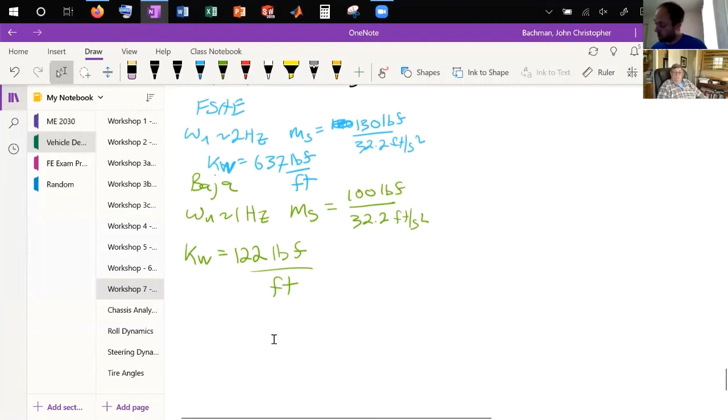And then we said, okay, well, the roll stiffness in both of these cases, our roll stiffness K phi, is 1/2 times our wheel stiffness times our track width squared. So our K phi for Formula is 1/2 times 637 pounds force per foot times the track width, which is I don't know, 4 feet, squared. So your K phi is 0.5 times 637 times 16 roughly. So this is 5,096 pounds force feet per radian.

Or we can multiply this by 2 pi radians for every 360 degrees. We go times 2 times 3.14 divided by 360 degrees. It's about 88 pounds force feet per degree.

So check those numbers for me. Keep in mind, this isn't even the worst case scenario because you might be a little stiffer in the rear even than this. All right, so let's check for Baja.

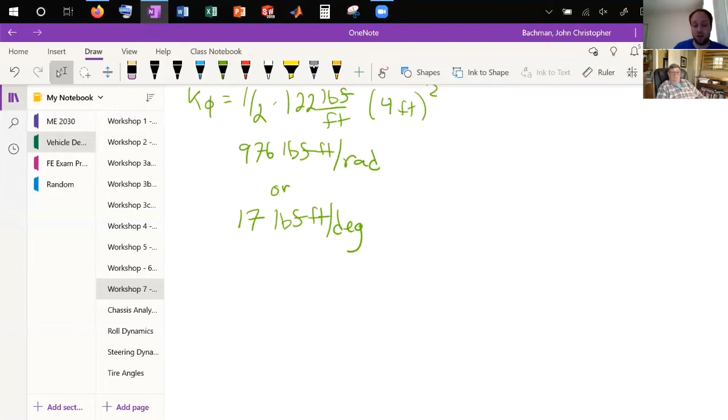So for formula, it's 88 times 15. You might want like 1,300. So K of the frame for formula, you want somewhere in the range of, round up to 1,500 pounds force foot per degree, so that your frame is much stiffer than your suspension.

And for Baja, it was 17 times 15. So for Baja, maybe K frame is equal to maybe around 300.

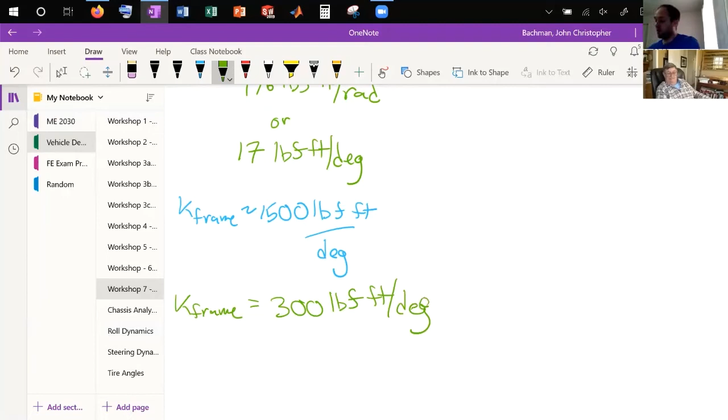And you might be lucky in that when you design to meet the rules, you might pass some of these already. But you should definitely be testing your frame's rigidity. So let's talk about testing our frame's rigidity a little bit here.

So let's go into everyone's favorite software. The right way is like when you do this, then you go back and recheck your suspension calcs to get it more accurately. We basically assumed this was 100% rigid, right? But in essence, it's kind of like springs in series, right? So this is deflecting and your suspension is deflecting.

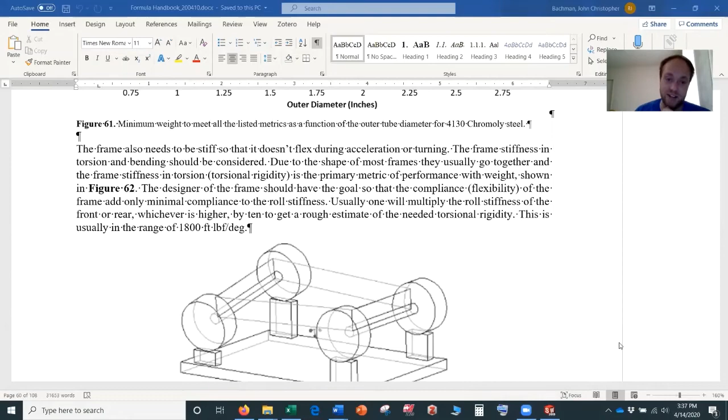So I think if you just do this, trying to make this almost negligible, maybe less than 5-10%, somewhere in that range, probably most of your suspension design is okay. If you really want to impress the judges, if you said, hey, I designed my suspension knowing and calculating the deflections associated with my frame, that would be impressive. Okay, so...

I mean, the first thing you should do is create the cross section of your tubing, and then you'll have to put it in a folder. So for example, you'll have to go put it in your program files, the SolidWorks Corp, SolidWorks, language, English, your weldment profiles. So I put in some custom ones, like Baja basically. I had trouble with it, you have to save it as a special type of file and you need to put in two, so you'll have ANSI inch and ISO here.

I had to put two files in, custom, and then I had to put in Baja, and then put in this one. And I put that in here. Then I had to mess around with the security settings and stuff, but eventually I got it to work.

I don't know, is there some trick to this, Leo, or someone who does these a lot? I got Andy to help me, but then I tried doing it myself and somehow made it work after so many trials. But I don't know exactly the proper way to do it. Yeah, that was me. He did it for me, or he knew it.

What'd you say, Juan? Did you have something systematic about why it doesn't work at first sometimes? It usually asks for administrator approval or something like that. So what we kind of figured out is we uploaded exactly how you had that Baja file, put it on our desktop first, then uploaded all of our profiles onto that folder, and manually copy pasted onto that special location where it says ISO and the Weldments thing. I don't know why, but if you do it in that order, it works.

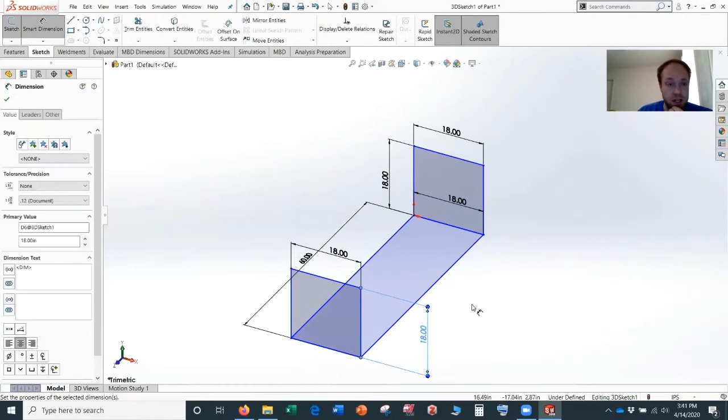So this is kind of the base of our frame. And then we'll have a front tab. We'll do the front portion of it here and this portion here. We'll make it 18 by 18, I guess, just for simplicity. Make this 18. Make this 18. Okay, and then I just need to connect the top for now. So let's connect the top.

We'll draw that first, and then let's put in like little fake suspension arms, just so that when we apply the loads, they're distributed correctly into the frame.

So I'll put these in. If this is 18 and our track width is roughly 4 feet, so that's 15 inches or so. And then this one is going to be, using the Pythagorean theorem, so this is half of 18 squared, so 9 squared, plus 15 squared, raised to the 0.5.

If I didn't break it. That didn't seem to work. Equals, maybe I didn't put the equal sign. Equals 81 plus 15 squared raised to the 0.5. There it goes, I just needed the equal sign.

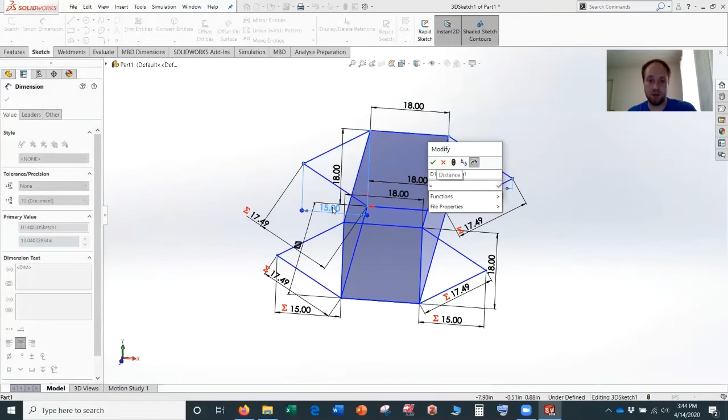This dimension is going to be equal to this dimension, equal to this dimension. That's kind of cool, if you click on it, it doesn't link it. This one is equal to this dimension, but it'll just bring in the value, and the distance out of this triangle is here. I'll do it again, equals here.

All right, so here's kind of the base of our frame. And then we need to add the tubing. So we'll add, say this is a structural member, custom Baja, so you select the one you want, and then we're gonna put in groups. You kind of usually do circles, right? Because this will tell you how the things are mitered together. So if I do something stupid, you guys have done this more than I have, just tell me.

So those are those groups. I don't think it'll let me choose that one. Oh, it does, that's nice. I don't think it'll let me choose this one though. So new group, these three. I think that's probably kind of dumb to do it like this, it's probably gonna make the joints weird, but honestly this doesn't really matter all that much for the test we're gonna run. It's not actually gonna consider the way it's mitered together. So if we look in, probably see some tubes are a little... oh, they're actually not bad.

All right, so we got our frame, and the next thing we kind of care about is what's the torsional rigidity of our frame. So let's go into the simulation, let's do a new study. We want to do a static study. We could look at the frequencies of our frame too - that would be interesting, have someone come and give an advanced topic about that.

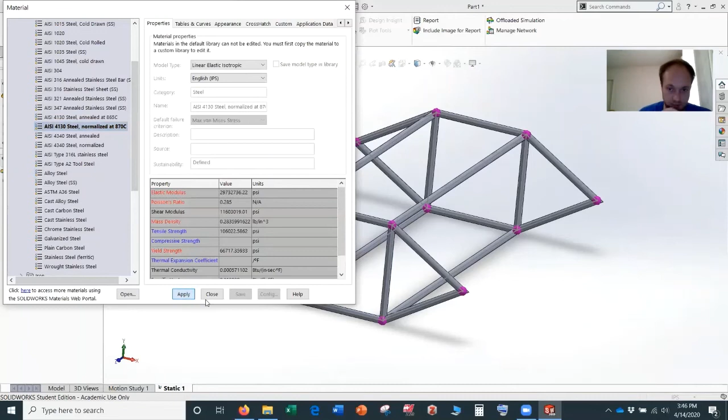I'm applying this material to all of them. Hopefully it did it - so right now you can see you have weldments, it has nodes basically. So what we can do is apply some fixtures - we can fix this node, and we can fix this node.

And then let's go to our external loads and apply a force. We're going to apply it at a joint, apply it at this joint, and I need to pull in my reference frames - maybe my right plane will be my reference plane. And I want English, I want this one for... it doesn't really matter what you put in here, to be honest, because it's linear, so you can put in anything. So we'll do 100 here, and then I'm going to do another force.

I could probably have been smarter and just applied a torque, but I don't know, I'm trying to make it simulate kind of roughly how the loads would go in for rolling our chassis. English, 100 pounds force.

Right, so right now you're going to see it's going to do a beam mesh. Honestly, a beam mesh is what you guys should be using a lot for these, anything that's long and slender - it's much harder for you to make a mistake because it's much easier to mesh, it basically meshes by itself. As opposed to doing shells or 3D elements, where there's a million things that can go wrong. So this should be kind of your baseline.

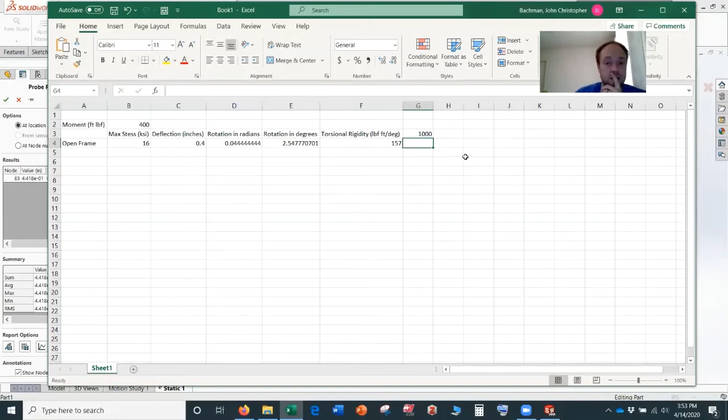And what we wanted, what we were shooting for here, right, was on the order of 1,000, at least for, sorry, for... Okay, at least for like formula, we wanted like 1500 or something like that, right? And for Baja, we wanted at least like 600.

Is this right? 0.4 inches. 0.4 divided by 9 was the radius. Okay, I think that's right.

I'm surprised how stiff the frame is already. I mean, I guess it is all primary tubing. And keep in mind, if you had the actual suspension members in, I would probably look at the deflection out here. But because these aren't the real suspension members, I'm looking at the rotation of just the frame. And that's probably more specifically what the torsional rigidity refers to, is of the frame. But honestly, what we care about is kind of the torsional rigidity of our whole car.

So let's go back into our model. Let's see what happens. The first thing I would do is probably add some crosses here and here. So the first thing I'd do to stiffen this thing up would be to go from here down to here, and probably here down to here.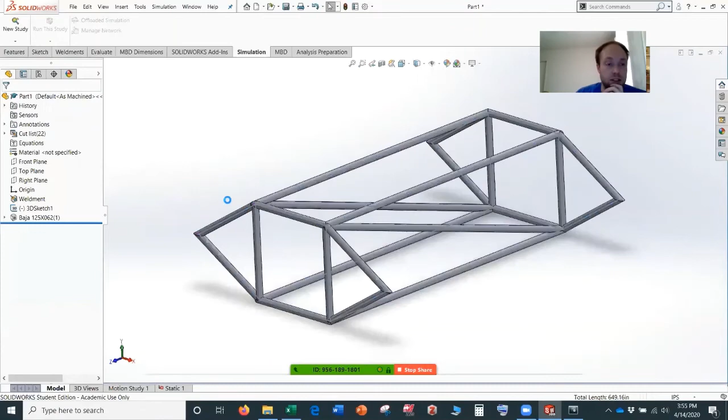Okay, so we're reconstructing our beams, right? So this is a 1D mesh. Juan, do you know how, does it somewhere tell you the type of mesh? Oh yeah, here you go, mesh type beam, right? There you go. So you can tell this is a different color.

That's because I need to come back here to my part and apply the material to all the bodies again. So apply, close, and I got this gray. Let's run this study again.

Okay. So the max stress now has dropped to about, I don't know, this orange color. Maybe about one, let's see, let's just do a probe. So probe like this point right here. So about 12. So it dropped quite a bit with just those members.

So, long triangulation. So I dropped to 12, which is pretty good. And then if we look at our displacement...

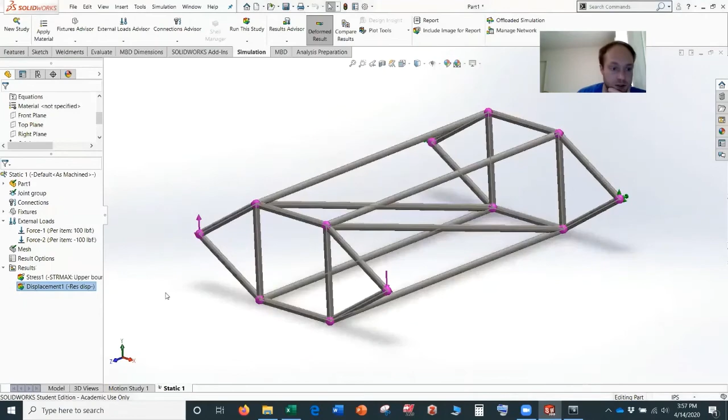I don't know what deals with that one. So we can now do again a probe. Probe right here in the middle of this spot again. So this is 0.22. So 0.22.

So back into our model. So I'm not happy with my frame yet, so I'm still trying to get it more and more rigid. So I'm thinking, okay, well maybe I'll add across the bottom of the frame, I can add a member here. If you want it even stronger, you might be able to do an up and do a double triangulation. So I'll add this one and let's see what happens.

I'm saying, well, maybe this is the driver's back, so I can add one there. Maybe this is the driver's feet, so I can add one here without paying a penalty. But the driver still needs to get in and out, so I can't add one to the top. All right.

So let's add triangulation, right? There's no point adding square faces, they're bad. You want to get rid of square faces because this top bar can go left and these will just rotate down, so nothing has to stay in a square shape, it can become a parallelogram without changing lengths, which means it's all in bending. So by having triangles, it has to be in tension and compression.

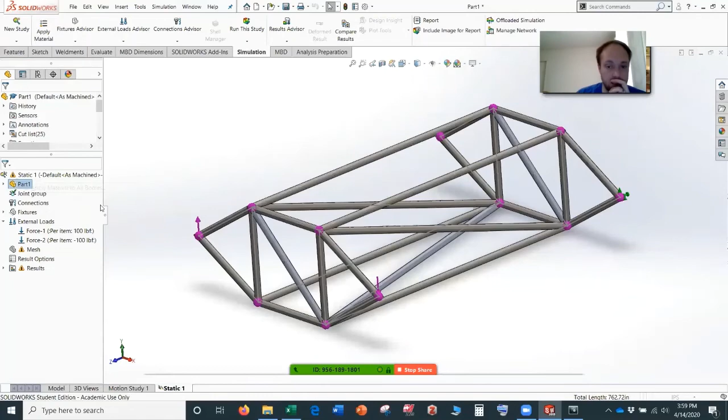Okay, so we're going to go back into our static study. The beams - we need to apply material to these new bodies. That's good, rerun the study.

All right, so the max stress is now, let's probe. About 15. That's interesting. Thinks it's about 15.

I'm a little surprised the bending stress went up in this tube. It makes sense, it's the only one not triangulated. I guess this tube now is carrying everything - everything else is really rigid except for this square up here, so it's really deforming that square. So that's interesting, that didn't really help much with making it stronger.

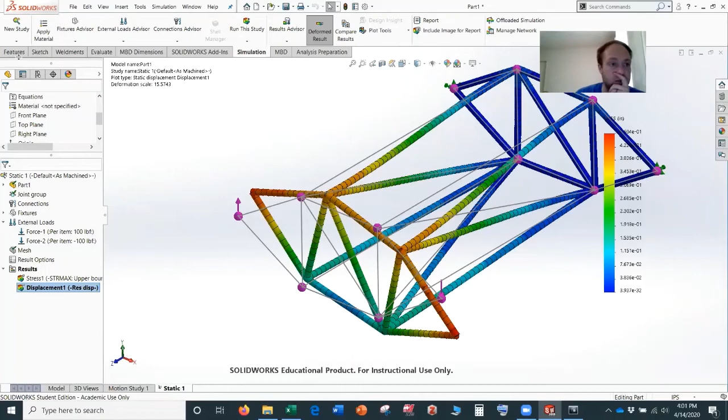Chris, the entire top of the chassis doesn't have to be open like that, though, does it? No, we could close off some of it. That'll probably help, let's try that. I don't know about the 50% mark. All right, let's try that, or a little better, maybe go 55 or 60% mark.

So we'll go about 60, we'll come here to about here, and then we'll go here. So out of that, we might have to change our plane. So we'll click this - I like it better if I go here.

Right, I mean, it would love to have a cross member from here down to here, that would really make this thing happy. But let's try with this to start.

And then let's add this, so add this one. Make a new group, this one. We might even segment these half off too at some point.

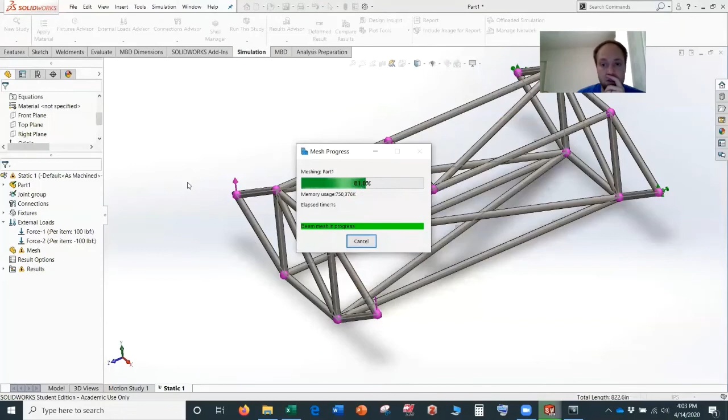Interesting. So if we probe here, so that's about 12. So that's a little happier on that.

And then let's look at the max displacement, and let's probe. Let's put it here - so this is 0.05, so that looks a lot better. So 0.05. So that gets us close.

So this is front, top, and closed, right? And then, so you can see, you might also try making kind of another square in here, right? And you'll see actually old cars, they'll have a special piece of material in here. Let me pull up...

This is ideal, but if you can't put something across, sometimes you have to make a square in this frame super stiff, right? And that's why they put basically bulkheads, right? So that's where you have special areas that have that stiffness, because you can't get this tube across here - someone's feet have to go, right?

So let's say, for example, if you didn't care about the person, how good could you get this thing? I think the ideal thing would be to take a tube and go here up to here, which you obviously can't do because the driver is going to sit here. But let's just look how much better it could get if you could get some material in tension and compression.

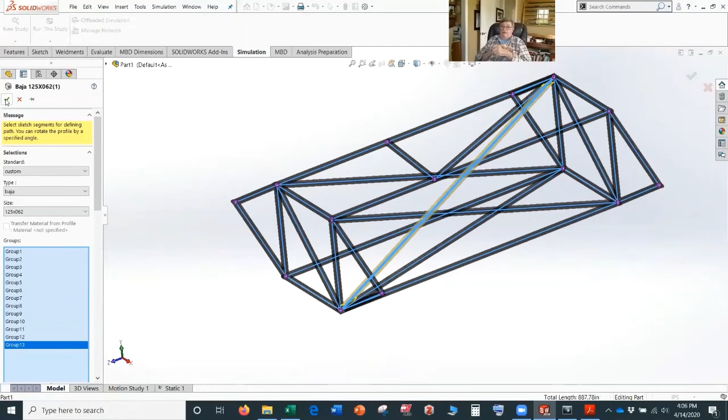Your tubes that went from four on a diagonal from the back to the front, you could tie into those on a diagonal. That went right through the car though. It ain't gonna work, no, this one ain't gonna work. But just for kicks, for shits and giggles.

I mean, you might do one up top and then one down to here too as well. Actually, I'm gonna do that. I mean, we can probe here. So this is slightly less, but let's go back into my model. Sketch.

You should write all this down, but we're running out of time. Because our top is weak, I'm actually gonna tie in the top. I think we'll get more bang for our buck. Well, didn't like that.

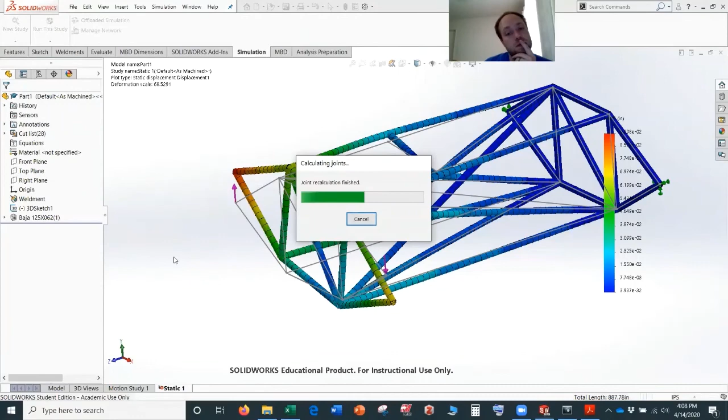I messed with one of my other groups, I think, basically, but let's see if it can still run the mesh. I might not care about the weldments here in the mesh. Okay, so we'll run the study.

So this is good. So we probe it now. Right, so now we're only at 7. So this is with full diagonal. So we're at 7. So we're much better.

And then in terms of the displacement, we'll probe it. So here we're at 0.0038. 0.038 actually.

So now we're at the 1650, right? So now we're up, I think, in a place where we're pretty happy. So now, if we get something like this, we'd be pretty happy. Obviously, it was not super easy. It was not super easy to do though, right?

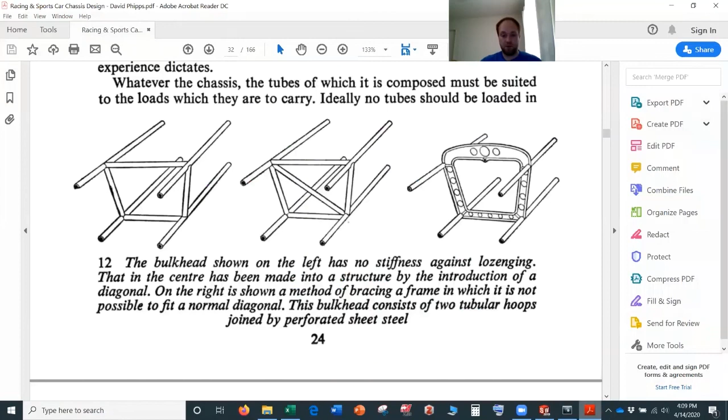So I guess the last thing I would talk about, the frame, so we got our 1500 there at the end, but we would have to do a lot more, is how would I kind of go about designing the car, basically. And so,

The first thing is you got to read the rules, right? I think we need to know, like, what can and can not do, right? So you read the rules. So you also, I would say, along with that, you should know what the competition is like, right? You need to know what the track is like for all the events.

How things are tested, right? Knowing all these details is really, shoot, for Baja, we care about how do you line up in the morning for an event. We know on the first day of all the dynamic events that the hill climb gets eaten up. And so you need to get in line for hill climb first for a fresh hill. So we, on dynamic day, we will immediately be the first ones in line to try and go to the hill. And you'll see teams on the acceleration events, for example.

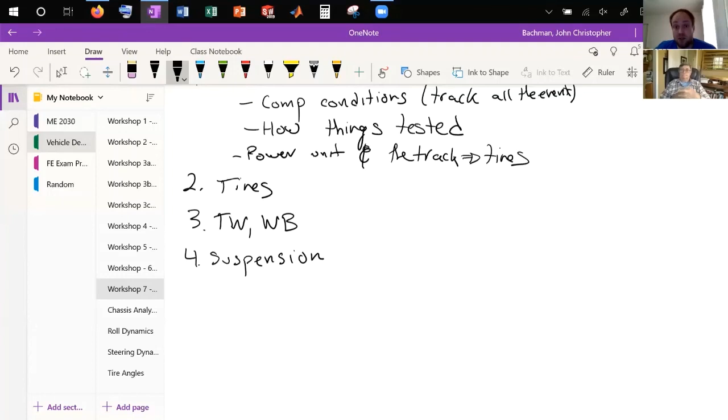And after that, I think you start to think about the dynamics of your suspension. I think those will both come into play. So you're talking about suspension.

Next, I think you're starting to think about your drivetrain. This could go at the same time after your wheelbase and track width. You're thinking about your gear ratios, how you're getting your power out to the wheels. Once you know your suspension, you can know if you can use U joints or CV joints. You start about the drivetrain, and then...

You're probably at the same time thinking about steering, especially with the suspension. So we should kind of call these maybe like 4A, 4B, 4C. These are all kind of happening together, right? You're kind of thinking about all these and iterating, talking to each other, because steering affects the suspension and vice versa. Same with suspension and drivetrain, they're affecting each other.

And 4D probably is your chassis. Your chassis is basically looking at how it can support all these other systems and keep them stiff. So then you're thinking about your chassis last, and you're thinking about driver connections and stuff. It shouldn't be neglected, but I think that's the order at which I'd approach this problem and the process I'd take.

And so I want to show... let's look at some examples. So I put all these in here. We'll start with formula. So we talked a little bit about...

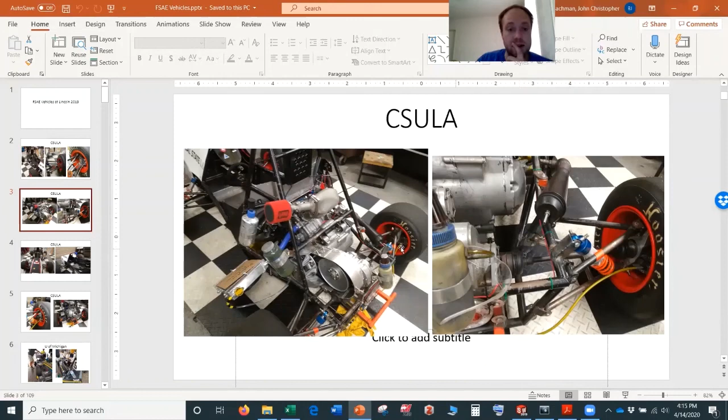All right, I think our front was better. It's hard to see here, maybe we can see it better. Ooh, I don't have a picture, I gotta get a picture of the front with the nose cone off. This one? Yeah, you can kind of see it here. So I think they did a good job of putting the mounts close to the nose, but there's a lot of tubes in the front here. Remind me to get some more pictures of the front.

Or let's look at like Baja. Let's look at this year's car. So some things I think you could, I mean me and Juan have talked about strategies for this stuff a lot.

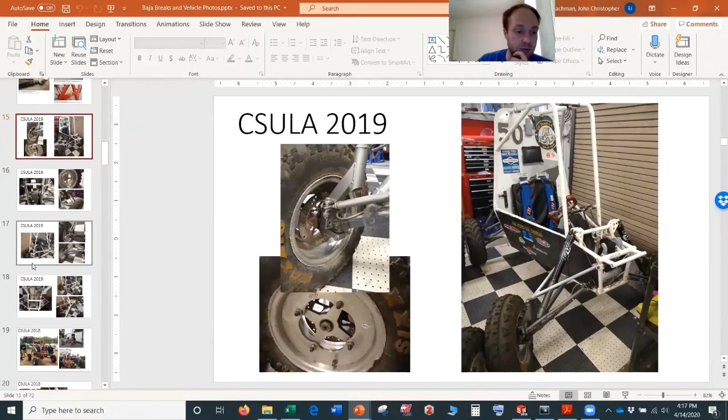And let's see if we have some... trust, I don't have 2020 pictures on here. Yeah, let's look at here. So like again, if you look at the rear, this is pretty close to a node, which is good. This is kind of in the middle, that's not so good, but it's just the top link. The top link doesn't handle a lot of force.

But the shock, this shock is right in the middle of this long tube, and the tube is bent here. This is probably not a good design. I probably wouldn't bend the tube where I mount a shock to it. And it's going across. Ideally this tube, the shock should be mounted right up here into this node right here.

Something super rigid. But yeah, I think with that, that's the end of all the lectures I was thinking about giving. I'm guessing folks will feel free to request to talk about something again or to look into something more specific.